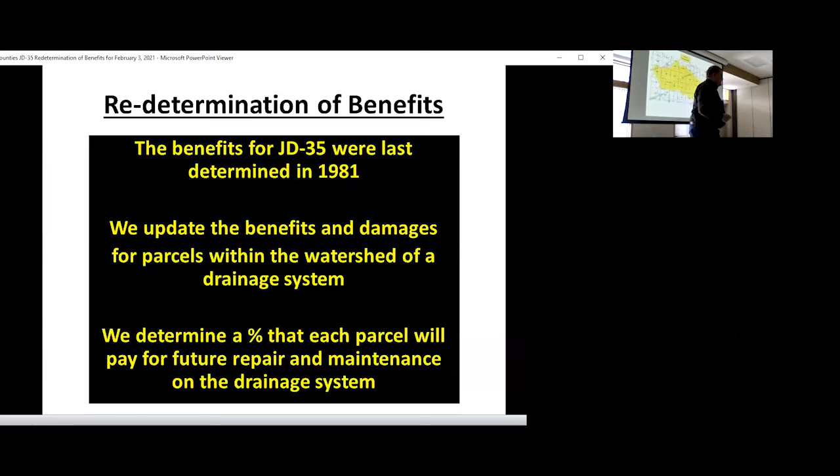This is the second of 3 meetings. The purpose of this meeting is to explain what we're doing and how the process goes. We're trying to give you as much information and be as open as possible about what and why we're going to be doing the redetermination.

That's the information for us. The information from you is what we really look forward to as well. We want to learn from you anything that is unique about your parcel or the whole ditch system that we may not have discovered yet as we're going through these parcels. As we're going through this, if something doesn't make sense to you, we'll have a question period, or we'll stick around afterwards to answer those questions and get that information from you.

Obviously, tile installation has changed immensely since 1912, and even from 1950 when this one was established. Nobody believed that we'd have some of the equipment we have. If you had told them 100 years ago the type of tiling equipment we have available to us today, they wouldn't have believed it.

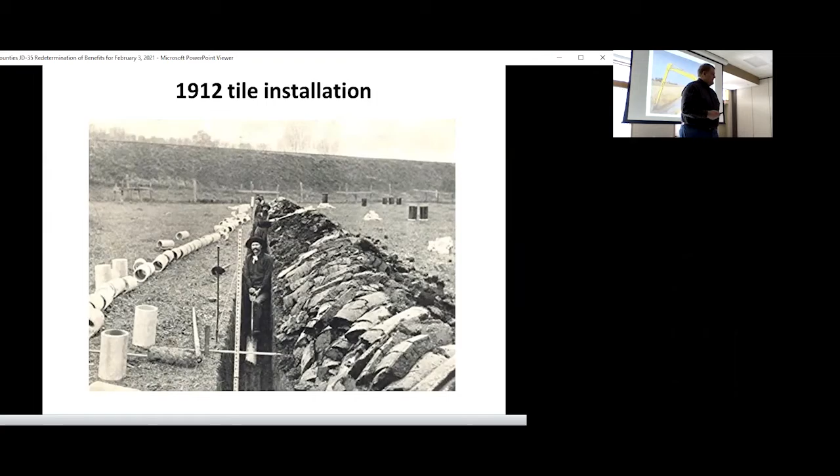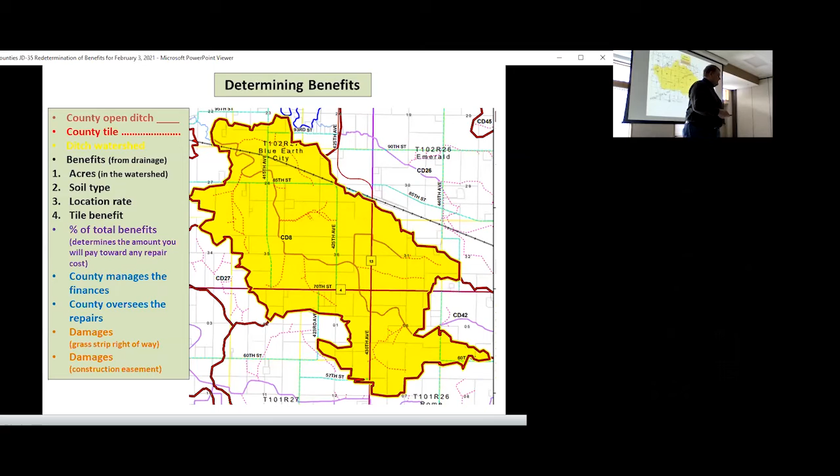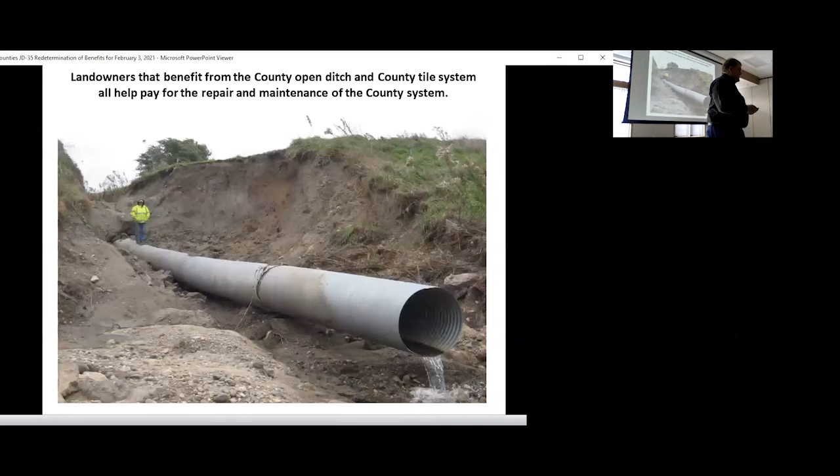Okay, again, this is your watershed. As we go through this, landowners that benefit from the county open ditch and county tile system all help pay for the repair and maintenance of the county system, whether it's a small blowout like this, or a ditch slide like in the previous slide.

Again, to review, the four things that determine your total benefits are your acres within the watershed area, your distance away from the county open ditch or county tile, the soil type, and if you have any county tile on your property. Looking at the benefit acres, this is how we determine the benefited acres.

By state law, we need to look at each parcel or piece in a 40 acres or less situation. So if you own 160 acres, you're going to have 4 parcels that we'll look at and divide out. If you just have a 10-acre parcel, we'll just look at that.

Looking at this parcel here, it's a 40-acre parcel, a 40-acre zone. As far as benefited acres, we take off the acre and a half for the road, we take off the open ditch. There's a couple other adjustments we make, but in this case we take off an acre and a half for the road along there. The road authority is responsible for the benefits for the road, not you as a landowner, because you don't financially benefit directly from the road. So in this case, there's 38.5 acres that have been benefited.

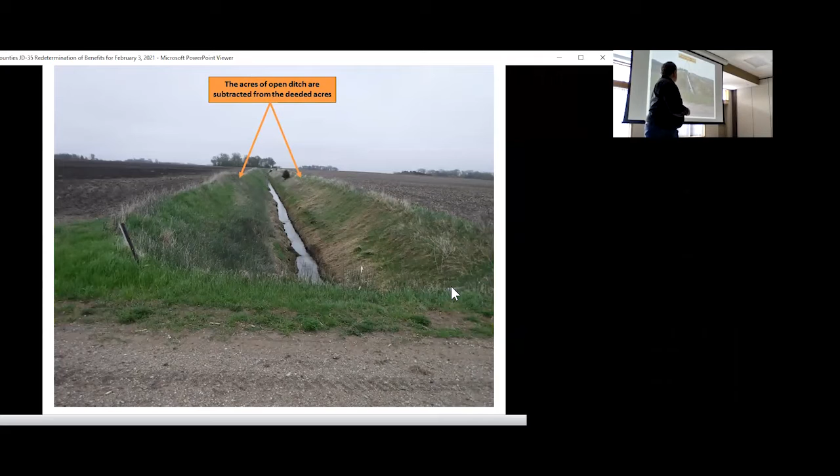The other thing we look at is the number of benefited acres. Obviously there are other watersheds around, so as we're looking at those bordered areas, we want to make sure you aren't getting double assessed or over or under assessed for those acres. If you own 40 acres, your water goes somewhere, and we need to determine whether it goes into, in this case, JD 35, or into the surrounding watersheds - in this case JD 12. It's in the process of being determined, along with County Ditch 101, 72, 38, and 49.

What we do is look at each of these if they've been redetermined recently. Along JD 12, we're in the process of helping with that redetermination. We'll look at that 40 acres, make sure that after taking off for the road, in this case roughly 38 acres will be going to 35, and a couple acres will be going to 12. We make sure there's not more or less than 40 acres assigned to one of the ditch systems or watershed systems.

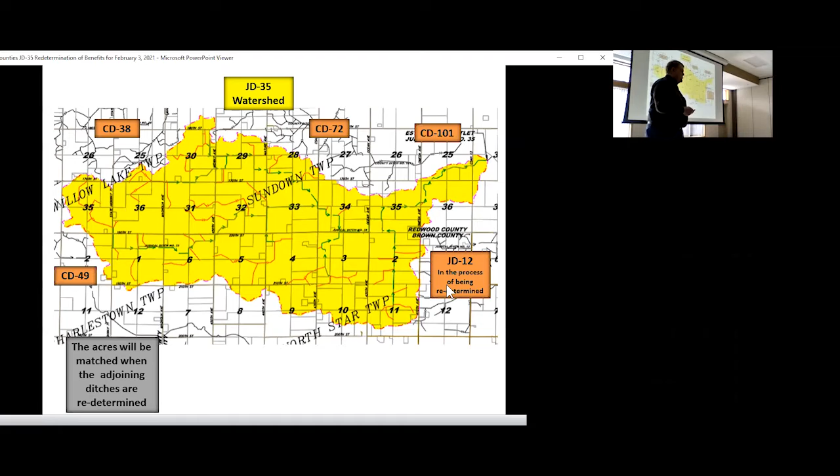What we'll do is adjust - if you're tiled out of the system, we start at 50%, so we take 50% of your benefits off if you're tiled out. There may be circumstances where we need to adjust that 50%. For example, if there's a low place that you've physically drained away, we'll lower that number, because we use 50% as a baseline figuring 50% of it is surface water and 50% is subsurface water. Your surface water stays in the system, but your subsurface water is tiled out. That's why we start at 50% and adjust from there.

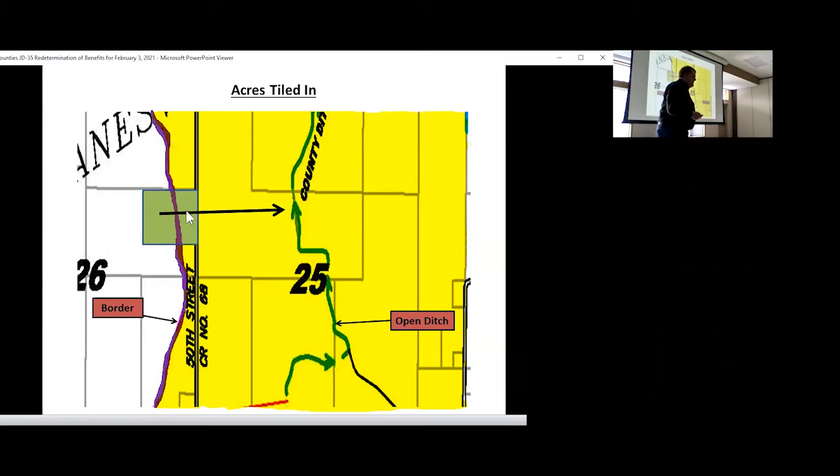Looking at the same situation, if you're tiled in, we'll do the same thing - start at 50%. The acres that are tiled in will assess into the system at 50% benefit. Then if you're on the border and the other acres are being redetermined, we'll adjust the benefits on the adjoining watershed and take that benefit off of those acres because they've been assigned to this system.

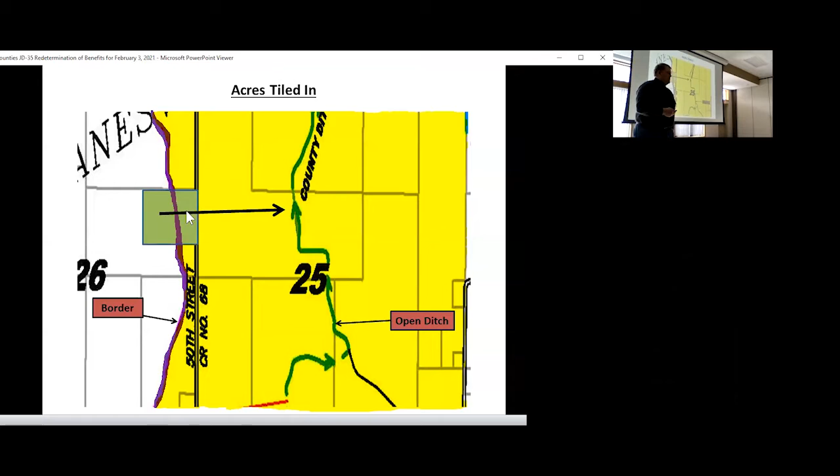This is an actual physical example of a system we've worked on. Looking at this watershed line, you can see the pattern tiling - it just made sense to tile everything coming into system 13. So we took these acres that were in system 44, assigned 50% to 13, and took that 50% off of 44 so you wouldn't be over-assessed. If you have situations like that, with pattern tiling or tiling where you're in or out, let us know and we'll make the adjustments as needed.

This is important because we want to make sure we get it right - there are statutes in place stating that unauthorized drainage into a drainage system is illegal. If you haven't gotten approval or the okay to do that, your outlet to wherever you're draining can be cut off, and there are penalties that go along with that. So it's important that you get the information right, and we get the information right, as far as where your water is going and how it's getting there.

After the redetermination is complete, you cannot tile from outside the watershed into the county system without petitioning into the system. There's usually a cost involved with that, and a benefit fee assessed to it. Any parcel that has benefits in the county system has a right to use that system on those benefited acres. So it's an important piece as we look at tiling in and tiling out.

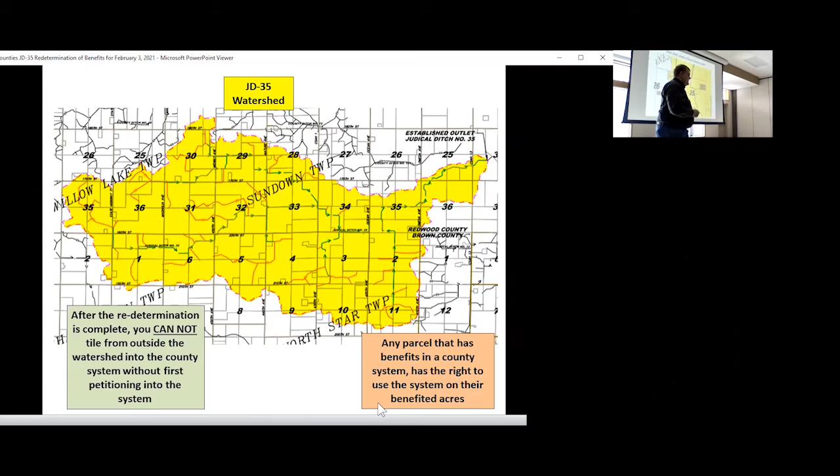The third thing we look at as far as your benefit level is the location rate that I indicated to you. The location rate is basically a definition for how far you are from the public drainage system. In this case, if there's an open ditch in the situation, we consider that 100% as far as location - whatever benefit value we come up with, we multiply by 100%, because we figure you have the best access to the public drainage system as anybody. So we use the ditch as our starting point, 100%.

We also realize that the farther away you are from that ditch, the more difficult it's going to be for you to utilize the public drainage system. So for every 40 rods away from either tile or ditch, we reduce the location rate by 10%. Right here he's on the ditch, it's 100%. The next 40 over, it's 90%. You might ask why it isn't 80% - that's because we also realize that if you have an impediment, such as a road, to utilizing that public drainage system, you're going to have extra expense or more difficulty getting there.

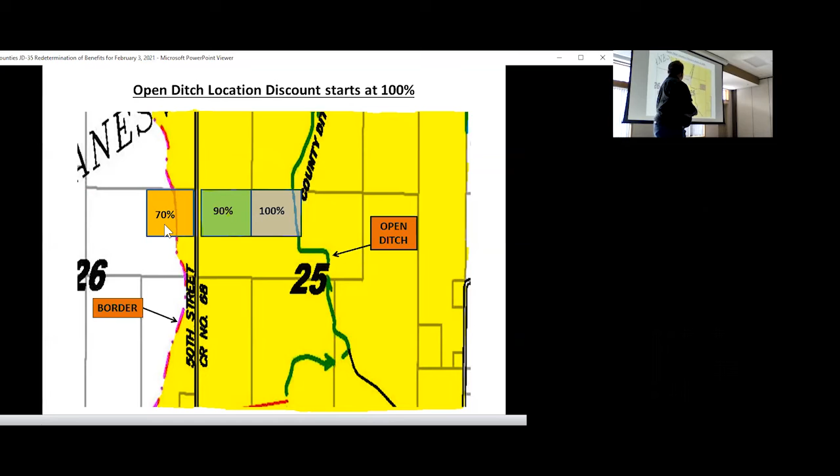So if there's an impediment, which is mainly roads, we reduce it an additional 10%. So in this case, we go from 90 to 70.

Looking at tile systems, we start at 90% rather than 100% if there's public tile through your parcel. We realize that tile is not as efficient with moving water as a public ditch is. So we start at 90% and then go the same 10% each 40 away from public tile.

One of the key factors, the largest factors that we look at as far as benefit values, is looking at the soil type on the parcel that you have. We classify soils into 4 different categories. If you've ever looked at a soil map done by USDA Soil Survey, there's roughly 80 to 100 different soil types that have been identified in Redwood and Brown counties. But we take one of those soil types, determine whether it's A, B, C, or D soils, and then we assign a benefit value to that soil type.

This is how we categorize the soil types. A is soil that's frequently flooded, and we're utilizing what it was pre-existing prior to drainage, any public drainage that was there. So basically A is any land that would be frequently flooded, cattails and muck and stuff related to the water and the drainage needs to occur.

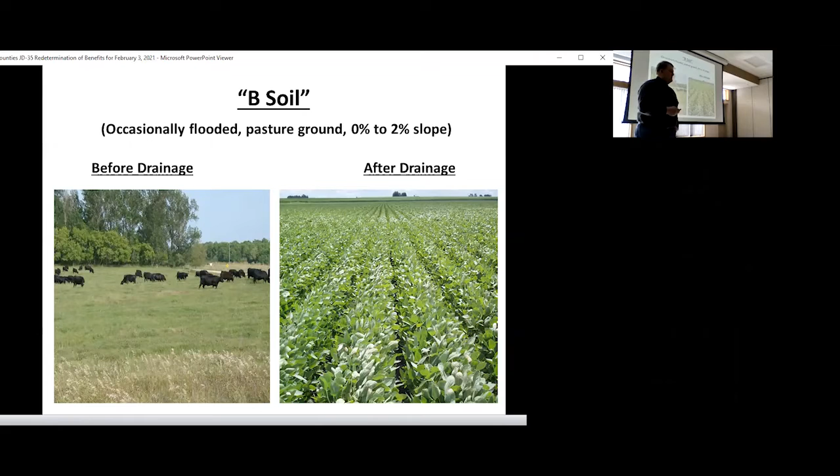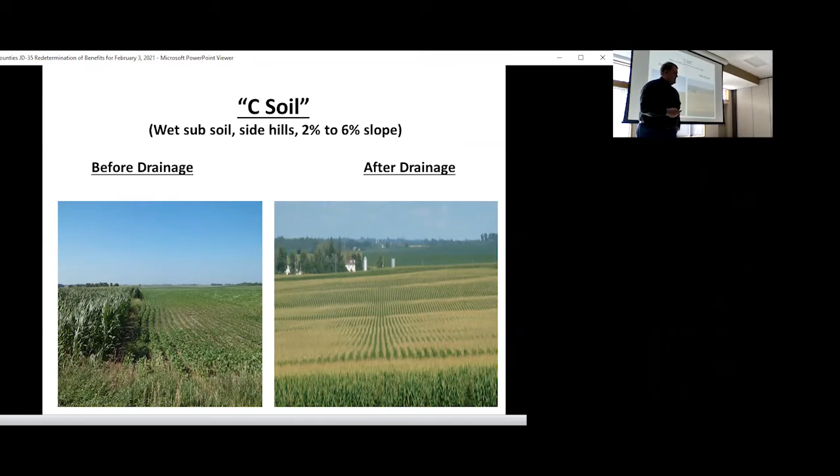B soils, again, occasionally flooded, pasture ground, 0 to 2% slope, does have a good crop capacity after having some drainage installed. C, again, a little bit more rolling, doesn't need as much public or as much drainage, will have a good crop after drainage. And D soils really doesn't need any artificial drainage. Probably the most realistic place would be along the side hills or up and down the drainage or waterway, just to get some of that side hill slope drained and that side hill seepage taken care of.

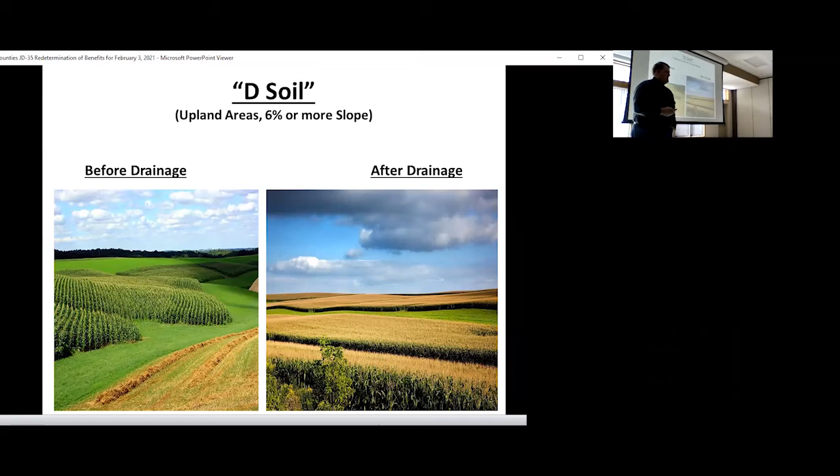The other thing we also realized looking at the benefits today is there is some tiling done on D ground. Mark was out driving around with his wife and he noticed this, and his wife didn't understand why he needed to stop and take a picture of that. But you don't see many pictures of D ground being tiled, but this definitely looks at that. Mark goes by that too fast to get any reaction.

Some of the other categories that we look at and make adjustments for related to your benefits is looking at permanent wetlands. There may be, whether it's WRP, CREP, RIM, those are permanent programs. We used to be able to get that information from FSA or the office, but with all the privacy rules in place, we don't always have access to that information. So if you have some permanent easements of permanent wetlands, let us know and we'll make adjustments accordingly. Basically, we only assess those at 10% of your benefit value, just because you needed to have it in crop at some time in order to get into those programs.

One of the other categories that we don't have access to, or usually can't see physically unless we're there at exactly the right time, is farmable wetlands. It's an NRCS designation. If you have some farmable wetlands, we understand that you have some limitations as far as any drainage you can do there, so we'll make adjustments there.

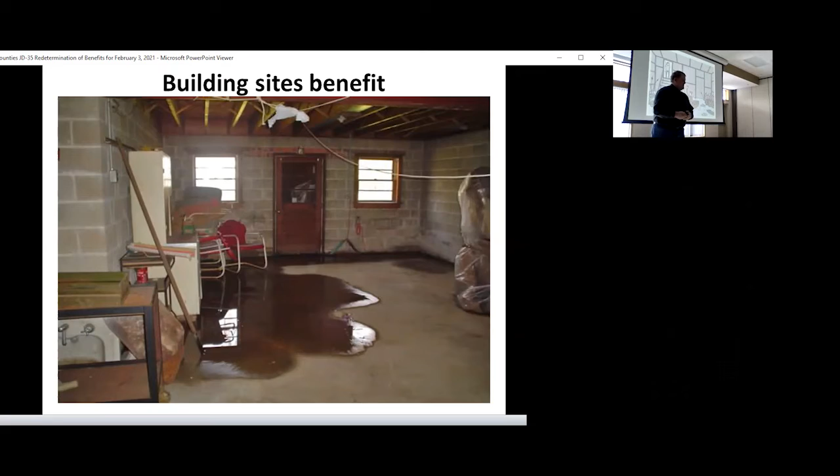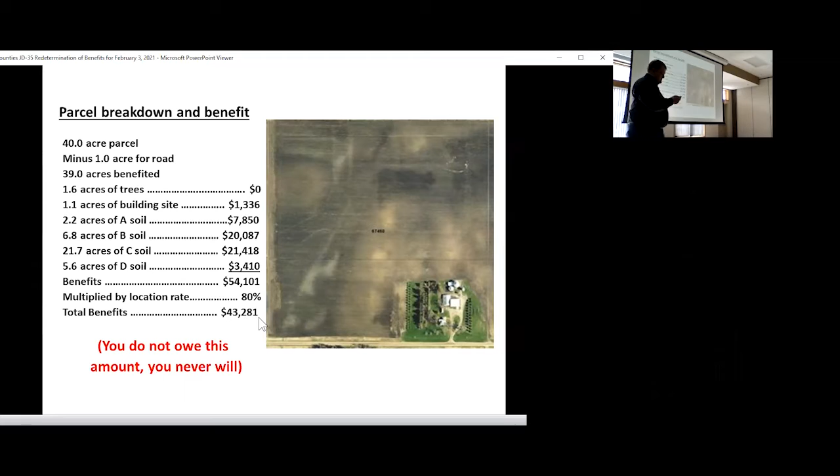In this case, we multiply by the location rate, which is 80%. So it's either two 40s away from a ditch or one away from a tile. So it's 80%. So your total benefits on this parcel is $43,281. Again, a reminder, you don't ever pay that. We use that number to come up with total benefits for the watershed, and then use that number to determine what your percent of benefits is. I'll reiterate that in a second.

Okay, this is a parcel breakdown if there's a county tile system. Basically all the information is the same, except in this case, since there is a county tile going through it, we multiply by 90% instead of 80%. So the benefit value is $48,691, plus the county tile benefit of $1,400, gives total benefits for this parcel of $50,091.

Okay, how do we determine those benefit values for A, B, C, and D soils? We look at a 3-year county average for corn yield and bean yield. We look at a county average for CER rating, and a township average for CER rating. Then we look at the average sale price for corn and beans over a 3-year period. We use input costs at this point in time from the University of Minnesota FinBin program. It's a record keeping system coordinated through the University of Minnesota, with, I'm not sure how many thousands of farmers involved, but each area of the state has a number of those.

As I indicated before, a couple of guys are active farmers. We have them review those numbers, see if they make sense to them or not, and we go from there. So those are the factors we use when determining benefit values. We try to use as unbiased and average information as we can. The input costs are the actual costs that farmers are reporting, and the average sale price is based on information we look at online usually.

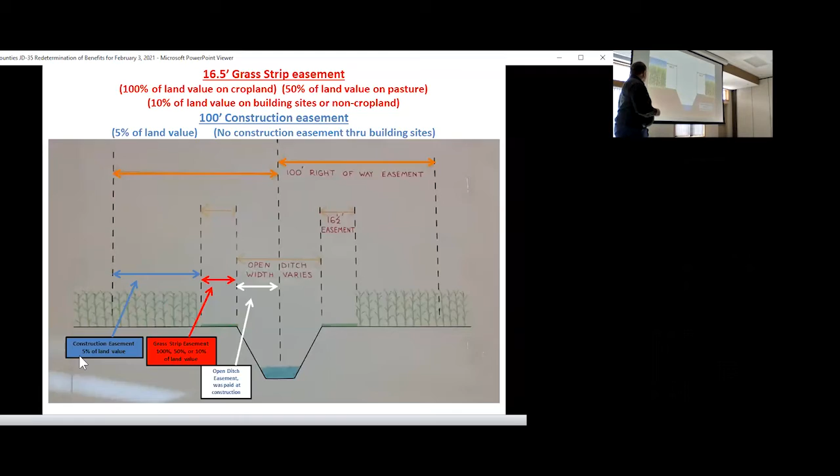Looking at this situation, the cropland here on this side will be paid at 100%. The grass strip easement on this side will be paid at 10% because it's not being utilized for cropland from the peak berm to the road easement. So that will only be paid at 10%.

Looking at this, because the ditch is basically in the road right-of-way, there's no easement paid there. This actually is a drainage ditch, but because it isn't obviously cropland, it'll only be paid at 10%.

That was probably the main one. Because pastures are utilized differently, that's usually what's paid at 50%. That's the main category that gets paid at 50%. Looking at it, that 16.5 feet always needs to be accessible to the ditch authority, so this fence needs to be moved back 16.5 feet so there's 16.5 feet available to the ditch authority to do repairs and make sure the ditch is accessible.

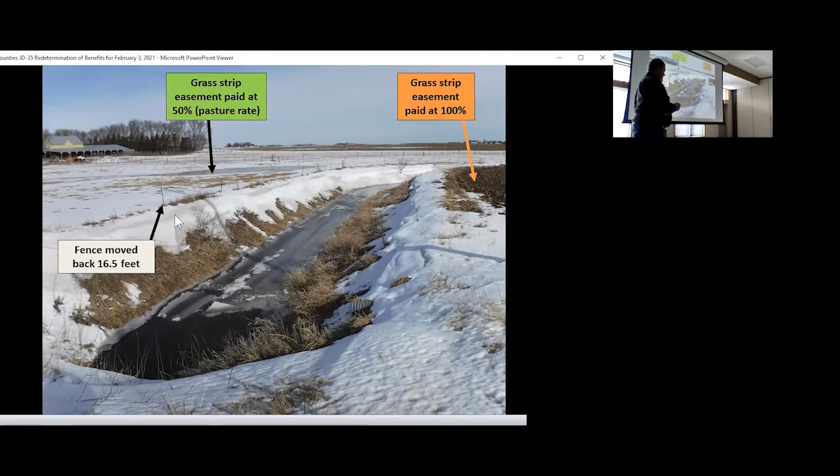Again, on that side, grass or the cropland is paid at 100%. Grass strip easement is paid at 10% of land value because we know that in a normal situation, they're not going to be using the building site for repairs and stuff. We do not pay construction easement through a building site.

For those of you who may have a CRP program and put that buffer strip in under a CRP program, in the present situation, you'll continue to receive that CRP payment. This one-time 16.5-foot buffer strip payment just basically goes on top of that CRP payment, so you won't get penalized on your CRP side, but you will still get paid for that grass strip. So we need to know whether or not that's CRP, or if it's just something you wanted to do, so that we get you paid at the correct rate.

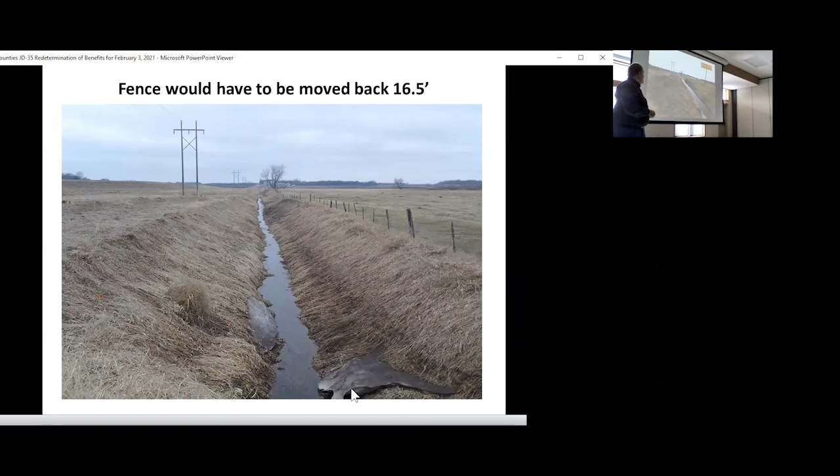And without all the adjoining stuff, good example of the filter strip. Again, another example, and the fence needs to be moved back 16.5 feet. Obviously he's not going to be happy, but it needs to be done. Same thing, fence needs to be moved back. Here, the same picture, the fence was moved back 16.5 feet.

One of the questions in the previous session was, what can we do with that grass strip? The main criteria is you cannot make a road out of it or utilize it in a way that it becomes a road. It has to maintain the grass cover, the vegetative cover, in order to be maintained. If not, you'll be asked to reestablish the grass strip along the ditch.

So obviously, if you're baling it a couple times a year, that's fine. It's still your land. You've just gotten damages and an easement for it. So you can hay it, you can hunt on it. The perception is that anybody can go on it - no, it's still private land. You still have control on it, and just because it was paid for by the watershed, that doesn't mean anybody can go out there. They still need permission.

Okay, Minnesota statutes, as far as who can be on that 16.5 feet by state law right-of-way: the engineer's assistants, viewer's assistants, they can enter the property making surveys and establishing any needed work. But those are usually established by the drainage authority to say it's okay. We're not going to be out there.

This is our second meeting. We're basically ready for the public hearing. The only situation I can think of now where we as viewers would be out there is if you invited us out to look at something. So I wouldn't expect anybody to be out there, not even these guys.

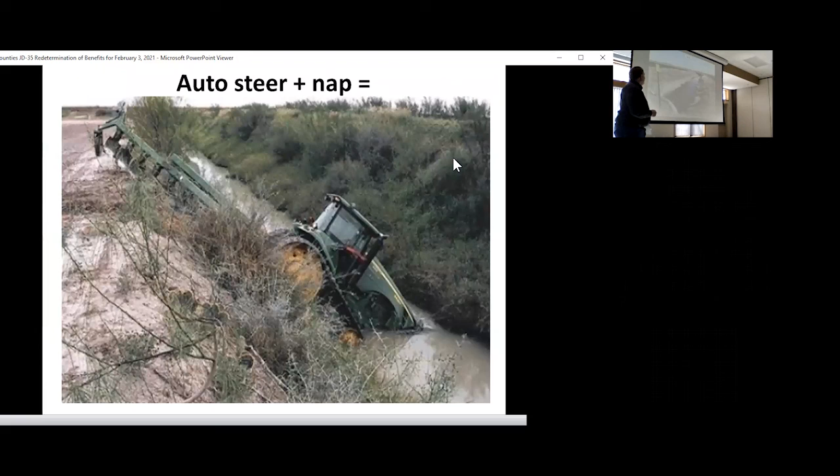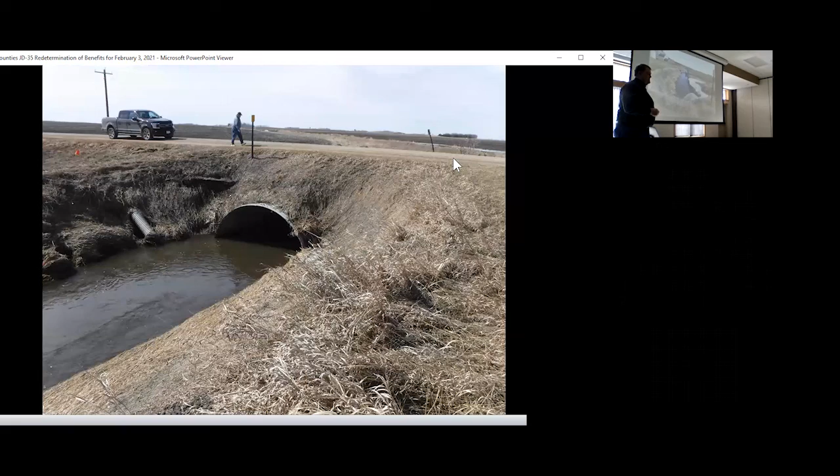There are some pictures of the system—35 goes into 36. These are Google Earth pictures. That one wasn't good, but fortunately that wasn't on 35. You guys live on 35, so you'll see these pictures. I'll run through them fairly quickly—this is what we were establishing our values on, watching through this.

When this drainage ditch goes through a road, under a road, is it the drainage ditch's responsibility to pay for putting in that culvert, or is it divided between the Department of Transportation and the drainage system? I'll let the drainage people address that one. Any road crossing would be the road authority's responsibility. If it's the state, county, or township, they would take care of that culvert or any repair and maintenance beyond that. But on a private driveway crossing or a field crossing culvert, that would be the drainage system's responsibility.

I've got some property in Redwood County. There's a bridge over the drainage ditch, and it's rated at only 20,000 pounds or something, so you can't actually go across it to get to the other side. If I didn't have some friendly neighbors, I couldn't get over there. I've talked to people about doing something about it, but nothing gets done, like purchasing some land to give me access to the 40 acres behind the drainage ditch without going across that bridge. Years ago, 20,000 pounds was fine, a tractor and planter could go across there. Nowadays it doesn't work, you can't take a combine across it.